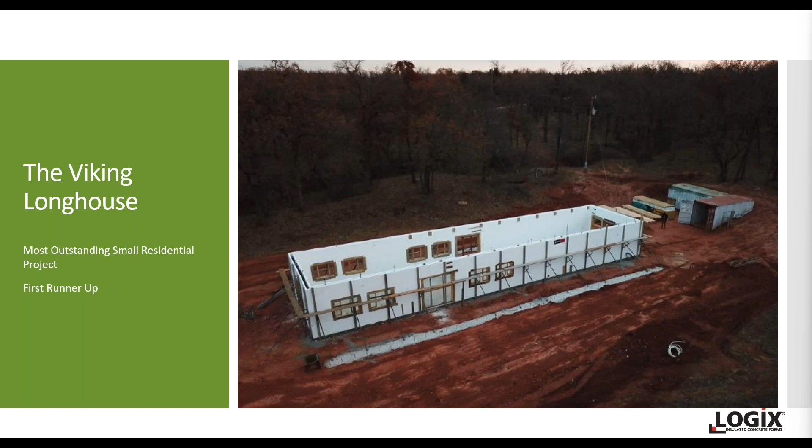This design concept has roots in the ancient Viking Longhouse, and it actually creates an ideal space for passive cooling and heating techniques. In the good old days, they used stone to create the walls and wood framing for the roof, and now Casey's using Logix ICF. So in creating this A-frame, Casey used the same concept.

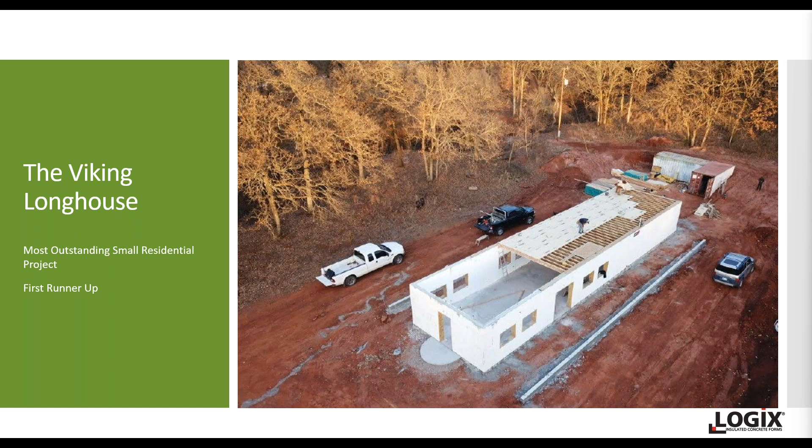The A-frame roof itself spans 38 feet. The roof overhangs 9 feet on each side, and that's going to provide space for covered porches and greenhouses, which is a really cool part of this whole project. You can see it starting to take shape here. The rectangle slab is oriented east to west and measures 20 foot wide by 80 foot deep.

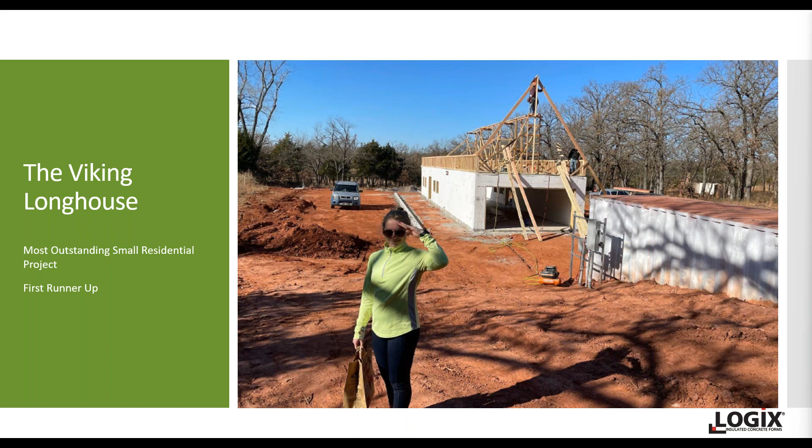And the wood frame gable roof is insulated with 2 inches of closed cell spray foam insulation, topped off with an ag panel metal roof. The downstairs is going to feature a garage, a utility room, restroom, living room, and kitchen, which is going to be open to the second floor with a Big Ass ceiling fan filling the space.

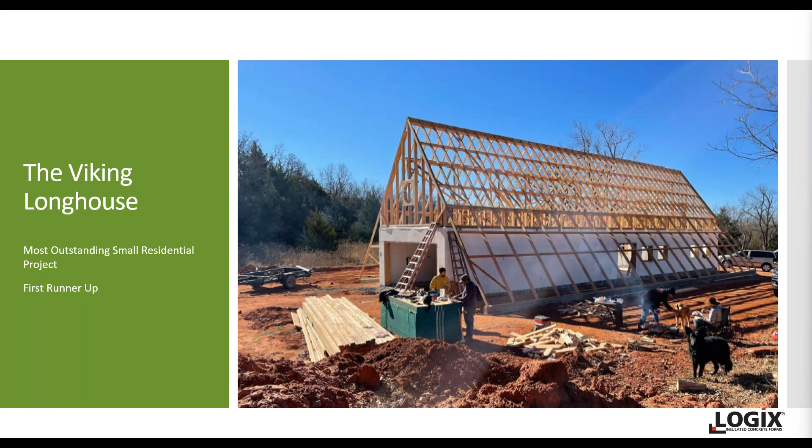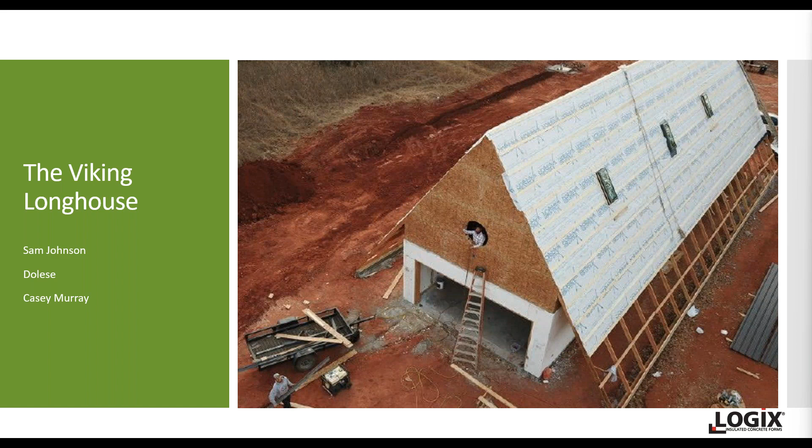The second floor is going to be supported by 2 by 12-inch ledgers and anchor bolts. And then the I-joists are going to span between the two 12-inch ledgers, as you can see here. And that's how the floor is being supported.

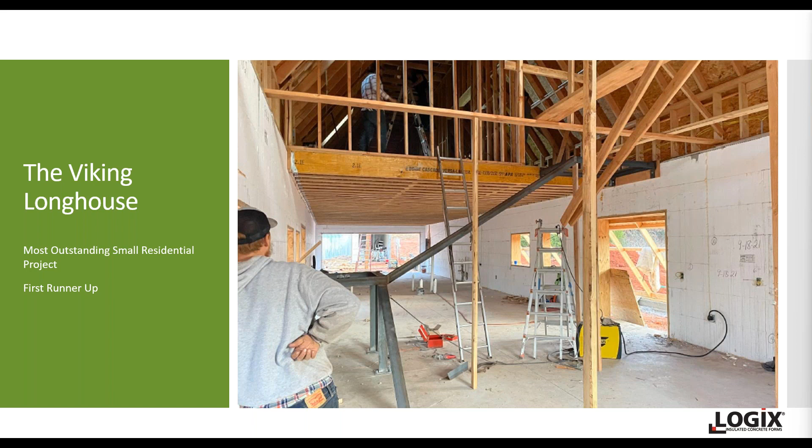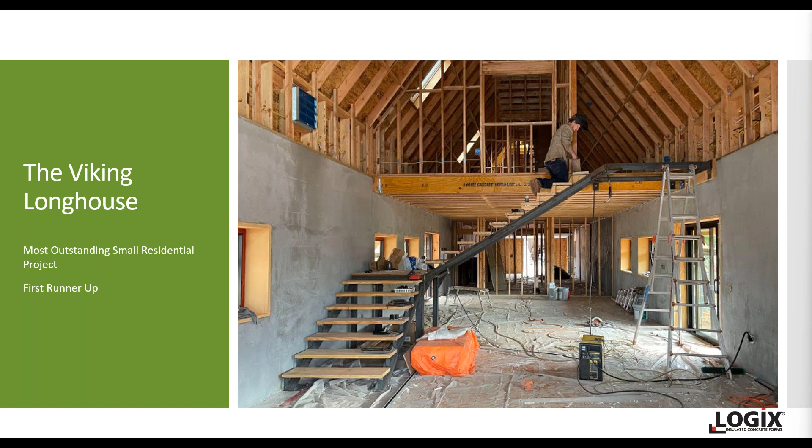The north-south facing windows allow for passive cooling and natural ventilation. Each bedroom is going to have a facing operable skylight to allow for stack effect natural ventilation. In the kitchen, there's a wood stove for heating the entire house, and the stovepipe spans the entire height of the open space. The Logix blocks were finished with a stucco in the interior and exterior, essentially creating an EIFS system inside and out. And the Logix blocks help create the thermal mass in ICF, help create this passive home.

It integrates a functional greenhouse within the home where the garden is in the pantry and it's considered just a utility, just like electricity and water are. It's a fantastic and a very cool design. It's something we can all learn from. And congratulations again, Casey with Sam and Dolese for the Viking Longhouse.

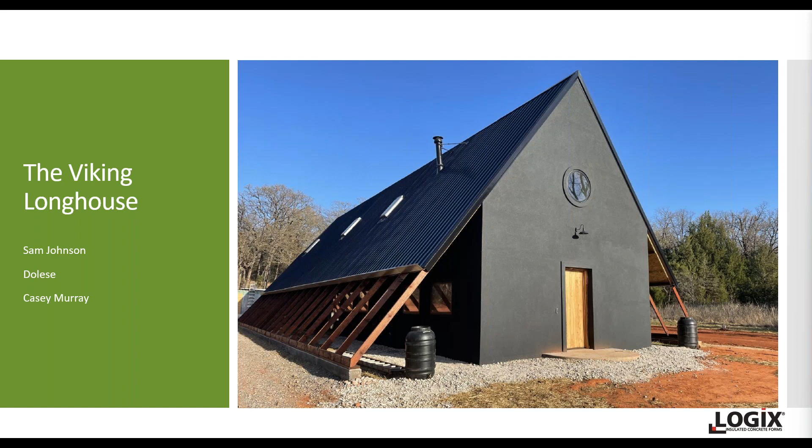All right, so that brings us to our winner in the most outstanding small residential category. And the winner is the Conservative Contemporary Home. And this is located in Creston, British Columbia, Canada. Jeff Nipper, Logix Territory Manager, providing the support. True Build Contractors are the builders of this great smaller residential home.

True Build is always focused on high-performance homes, and it had been using Logix ICF for a number of years for its foundations. But with the wood prices up, and you keep hearing that, they went with ICF to the roof with this new home aiming for what's called Step 5 compliance. Now, in British Columbia, Step 5 is the highest level of the new building codes being introduced in British Columbia. And in Canada, those codes in British Columbia have influenced the National Building Code.

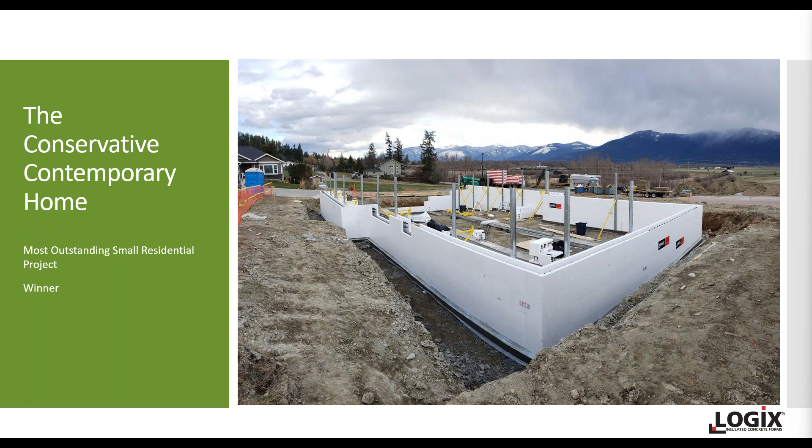And the National Building Code of Canada has just introduced its own set of tiered codes that are going to influence construction in the country of Canada for the next 20, 30 years. If you want to learn more about it, visit the blog that we have on buildwithhalo.com, one of our product websites, where we get into the 5 tiers of the National Building Code in Canada.

Essentially, the tiers right here, tier 5 is the highest tier you can do, and it's very similar to the tier that True Build hit with this home, which is a 40% improvement to the envelope and using 30% of the house energy target. So basically 70% less energy than the model home. It's a fantastic achievement. So this home was actually the first Step 5 home in Creston.

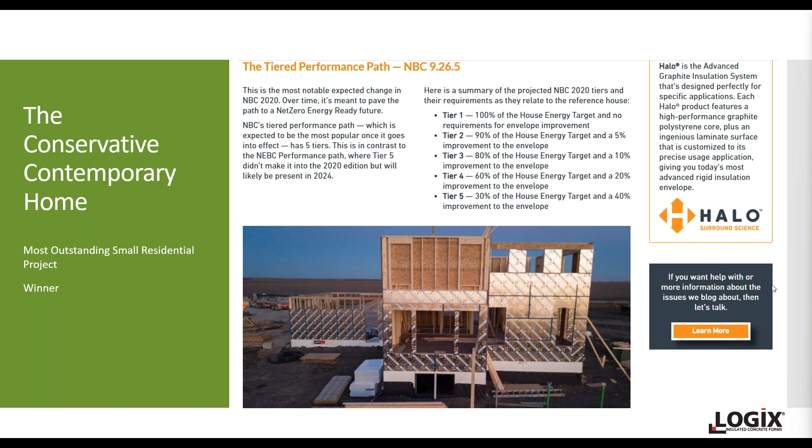So the way they did it in this case is they incorporated 8-inch, I know the picture's off to the side a bit, but it's 8-inch Logix ICF walls. Now they also inserted 2 inches of graphite polystyrene foam core. So they beefed up the insulation of the Logix wall to help hit that step 5. And so it just added more insulation power, and actually reduced the amount of concrete that you have to use, because it reduced the core back down to a 6-inch core for concrete.

This home, part of achieving these standards is to get a great air tightness score. And this home scored an awesome 0.45 air changes per hour, which is quite fantastic.

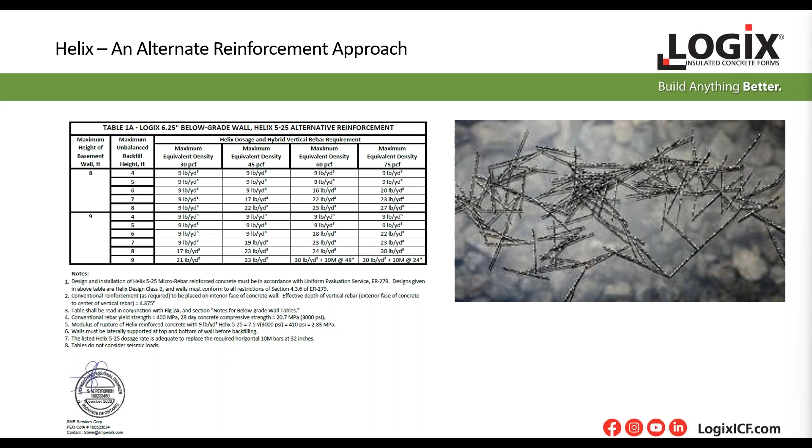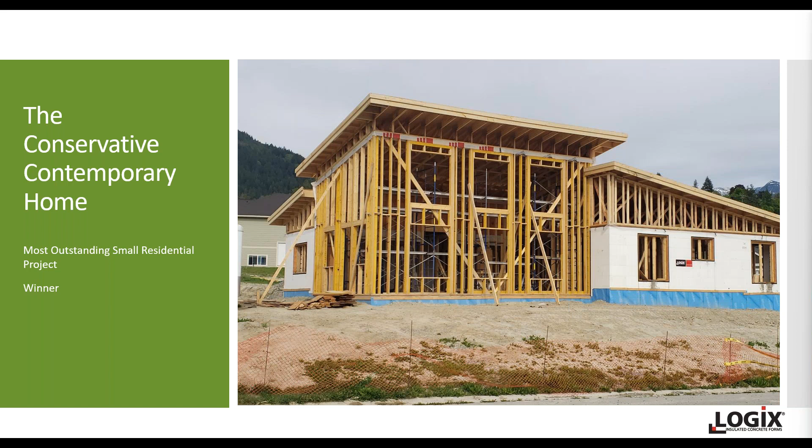But this was brought up to Logix thermal efficiency. They brought it up to approximately an R37 using R22 Rockwool and applied 3 inches of Halo Interra to the interior. Here's a picture of the Halo Interra, and that's one of our products as well. And you can see the Interra being used to beef up the inside.

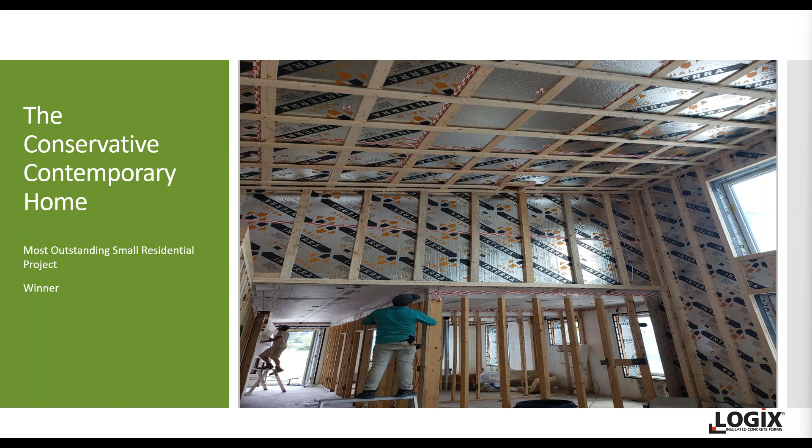The appropriate windowed elevations incorporated into the vaulted ceiling. There's a focus on maximizing the exceptional views of Creston Valley. It's just a gorgeous home. And you know, for a small home, a section of the footprint is actually dedicated to a fully featured in-law suite, which is quite unusual. There's a total of 3 bedrooms, 2 kitchens, 3 baths. The master ensuite features heated floors and a tile shower.

It's just a wonderful home. It's going to cost an average of about $200 a month to heat and cool. And every new customer that TrueBuild Contractors courts is sent to this home as an example of the way they intend to build going forward. So congratulations to everybody involved with this home. Jeff Nipper, TrueBuild, the conservative contemporary home, our winner, small residential this year.

All right, on to large residential. The first runner-up in large residential, which is always a very interesting category, is the oceanfront home in Plymouth, Massachusetts. 3,309 square feet of living space, 4,000 square feet of Logix wall. I mean, this home is very much influenced by its coastal location. It was the organizing principle for almost all the design and construction decisions made into the home.

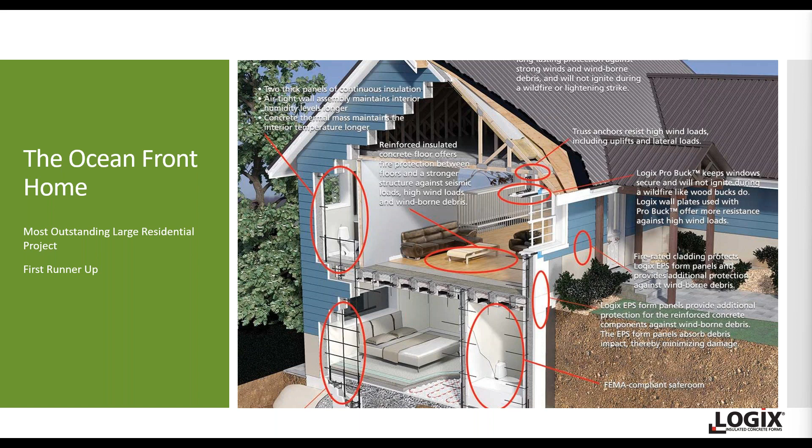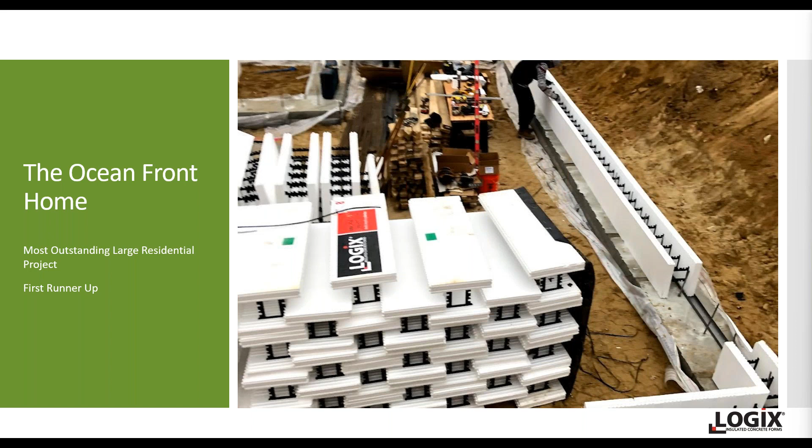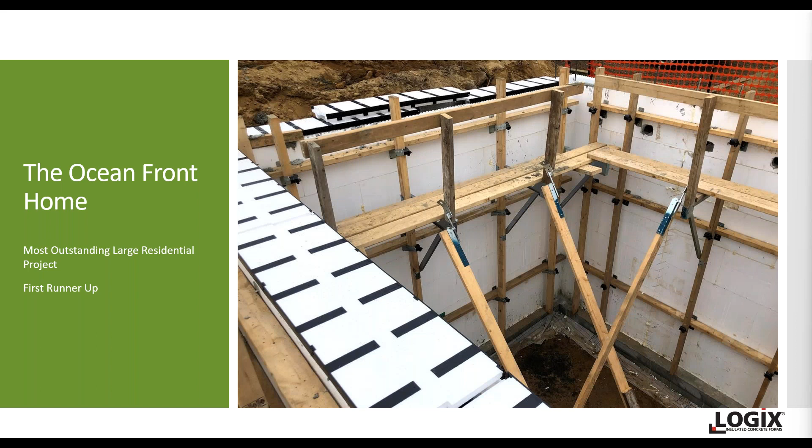This project used 8-inch Logix ICF in the garage and foundation portion, and then they transitioned to a 6-inch ICF for the remainder of the walls. That's quite a common way to build. Significant open interior space was completed with large floor spans that eliminated the need for supporting beams and posts, having high ceilings on all levels, just made for a nice, airy, open concept. So they've accomplished in a series of steps durability, comfort, energy efficiency, and soundproofing all in one.

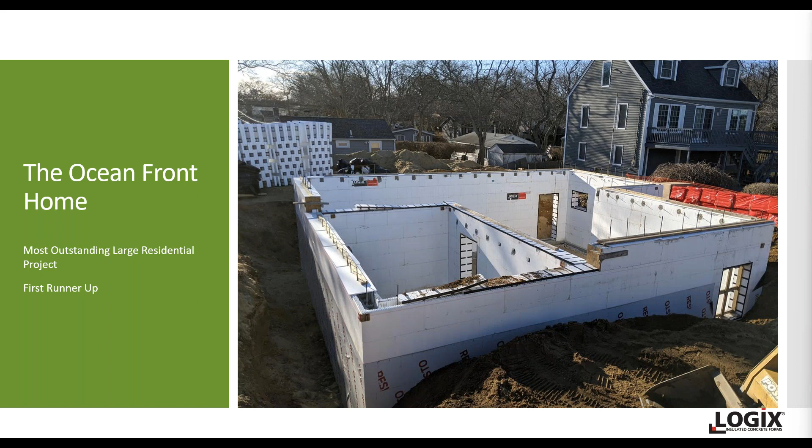Now, if you take a look at the basement as the basement's being built, you can see the basement being built, and then it looks like a concrete floor in the main floor being laid down. And you can also see in the basement here, the foundation, this is HeatSheet. So they've got radiant floor heating in the basement slab, and they're using HeatSheet, which is yet another one of our products, to place the PEX tubing.

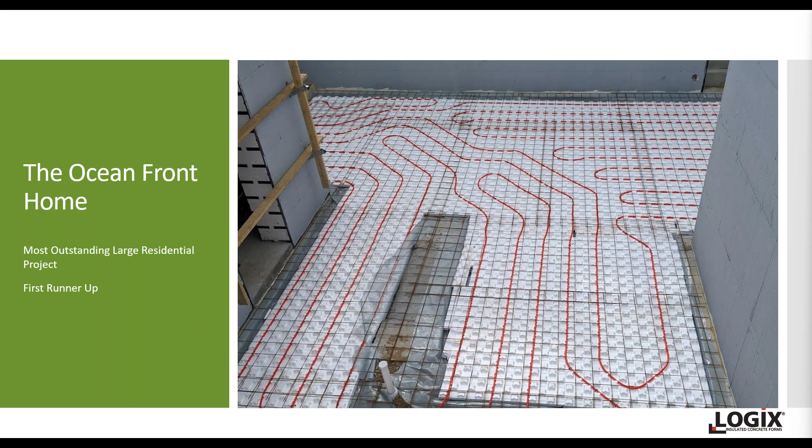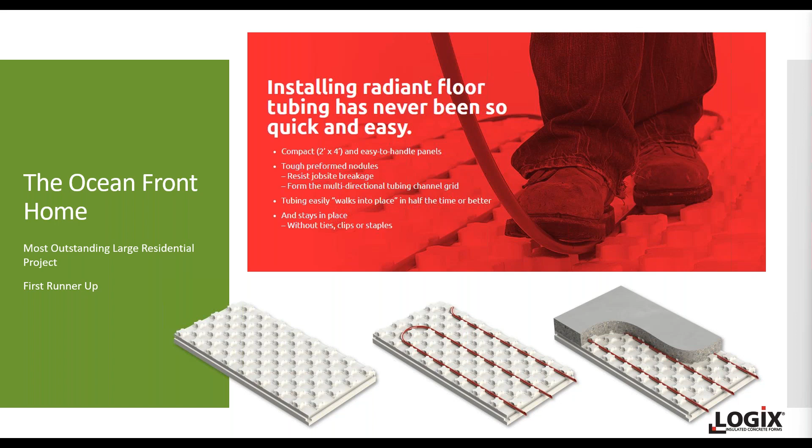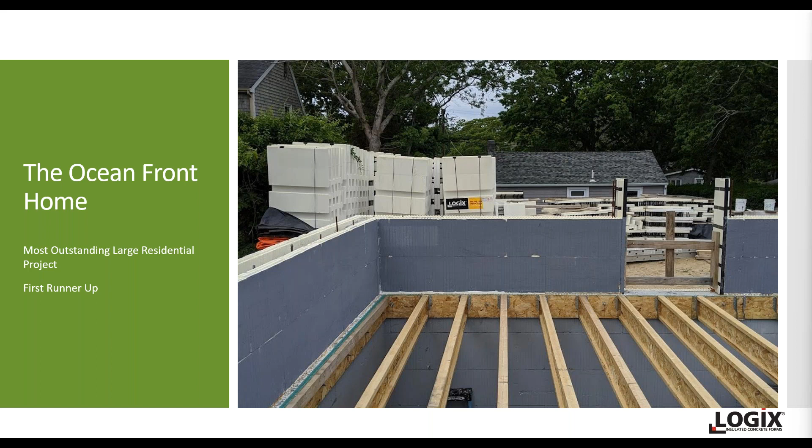Now you're going to see our product here with a gray color, and you don't often see this. What the builders did is they covered it with a latex primer to protect against the UV. And I don't know if we can necessarily recommend that, but that is what the builders and developer chose in this case to do. So we pointed it out. It seems to work very much for them. There's some of the slab work being done outside.

This is going to be an all-electric setup for appliances, heating and cooling, hybrid water heaters, and can allow this building to go off grid with solar panels. You can see in the window openings the Logix ProBuck being used to line the buck out the windows. And there's a bit more information about ProBuck.

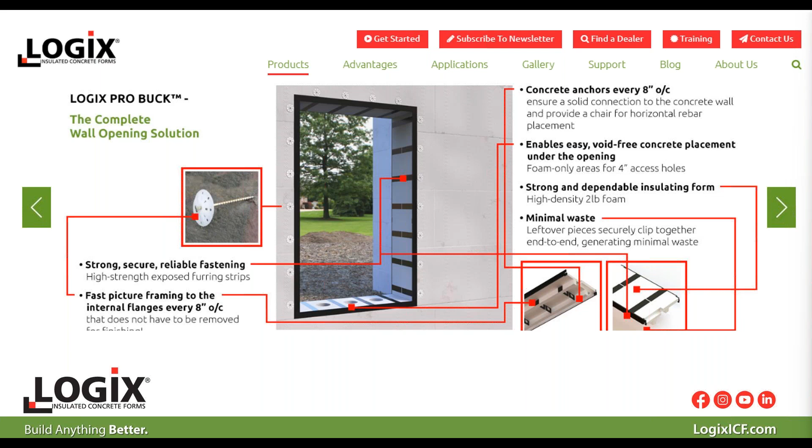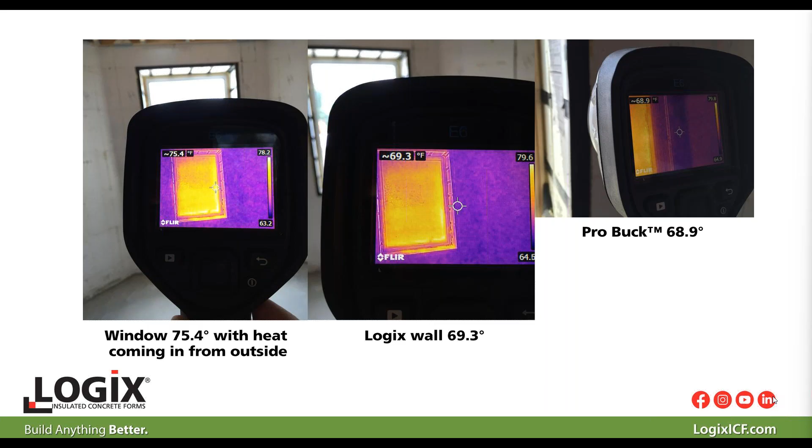And I think more and more of it's being used. It's just a great way to finish off the ICF walls, is to use ProBuck for the openings. We did some thermal testing and, as it turns out, when you use ProBuck, the temperature of the buck is identical to the temperature of the ICF wall, so it just completes the thermal envelope.

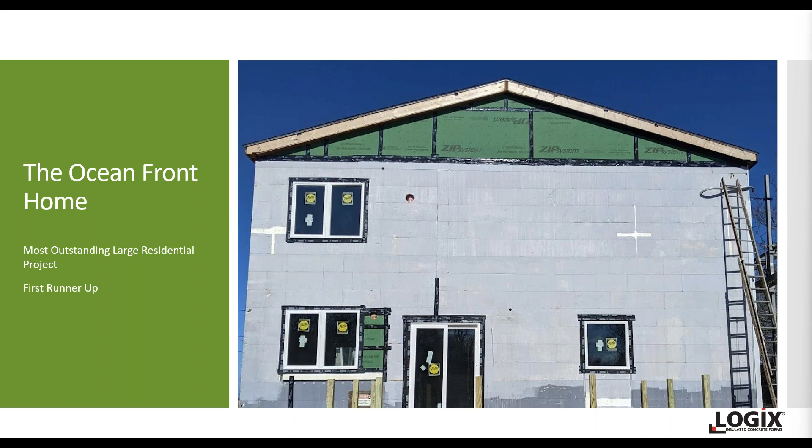So we should congratulate the builders and everybody involved with the oceanfront home. I think I was remiss right off the bat with not announcing the people involved with this fantastic project, and I'm sorry for that. But we're going to recognize Win Peck, territory manager for Logix ICF, who provided the support for this. But most of all, we want to honor Blue Green Building Concepts, who is the developer and owner of this absolutely wonderful Logix ICF award-winning project this year.

We will say one final thing: this home is the first off-grid home in the South Shore of Massachusetts, and it's received recognition from Gibson Sotheby's. So a wonderful, wonderful achievement.

Okay, on to the next project in this category, most outstanding large residential, the outright winner. The outright winner is the Urban Dream Home. The Urban Dream Home was supported by AMC Foam, the local Logix manufacturer, and Paragon Design Build, who is the designer, builder, and actually the owner of Paragon Design Build, I believe, is the owner of this home.

This home is located in the historic Assiniboine area of Winnipeg on iconic Wellington Crescent. It's 6,400 square feet of exquisite living space plus a 2,400 square foot livable ICF basement. It involves 6,700 square feet of Logix wall built in 45 days. Paragon decided to use Logix based on expected comfort, quality of construction, and the performance of the home.

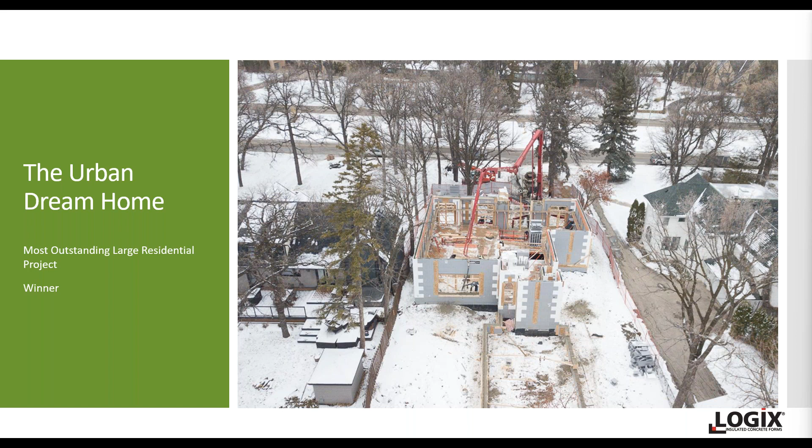This was a winter build, infill lot with lots of mature trees. It involved a 1950s wood frame bungalow teardown. It's a 2-story build that was noted by many Winnipeg business and homeowners, generating plans for very similar new builds. The house was designed to match the very timeless and iconic design of the stately surrounding manors.

This is very central, iconic Winnipeg construction. The front Tyndall stone is fashioned after Winnipeg stone cathedrals dating back to 1880. There you see it taking shape. You can see the 4-inch core there. It's the thinnest core that we offer. It's not the most common use for an ICF product above grade.

I guess most of our walls would be built with the 6¼ inch core, but the 4-inch core is a very strong block. It conserves the concrete, and it can be used. The 4-inch concrete core is part of building code in the United States. Up in Canada, it requires some site-specific engineering, but it certainly will reduce your concrete costs and can also increase your livable space inside by creating exterior walls that are a bit thinner.

You're also going to see some of the gray block here. Now, the gray block is actually, in this case, not latex primer. This gray block is deliberate. This is Logix Platinum Series block. It's a line of product that's made with a gray Neopor, graphite enhanced EPS bead, which you see here. And it just allows you to deliver a wall with increased R value without increasing thickness.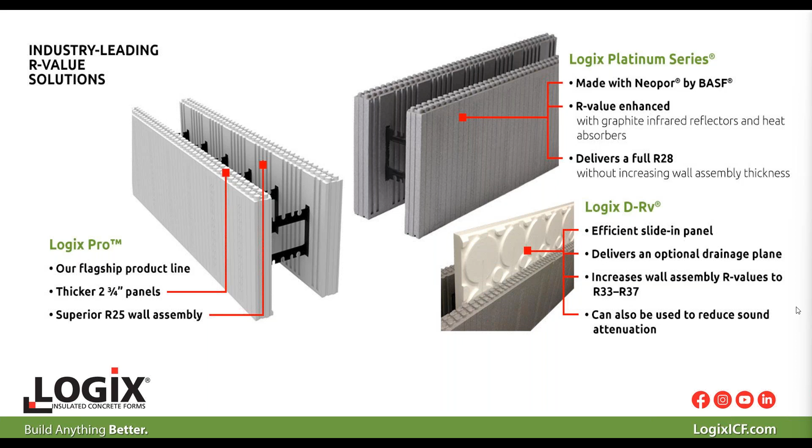On we are now to commercial. And our most outstanding commercial, well, let's take a step back here.

We've got a couple of different commercial buildings we're going to be profiling. And you know what? They're each going to look at the advantages of building with Logix ICF in different seasons. So these are two builders constructing in two different seasons, gaining benefit from constructing with ICF.

So our first project we want to recognize is the first runner-up in this category. It's Classy Chassis. The Logix territory manager, Mark Gifford, Carey's Lumber and Building Supply, the local Logix dealer providing the product and the support, and Clifton Land Company, the builder of this fantastic light commercial building. This building is a car wash facility built in Williamsville, New York. It's a 4,500 square foot footprint, and it involves 4,000 square feet of Logix wall.

It was built in 12 days, the Logix portion, at a labor rate of 0.08 man hours per square foot, and that's a very efficient labor rate. So Clifton obviously knew their way around this. They've been building car washes with Logix foundations for years, but now with this project started using Logix for more complex commercial construction. So this was a winter build.

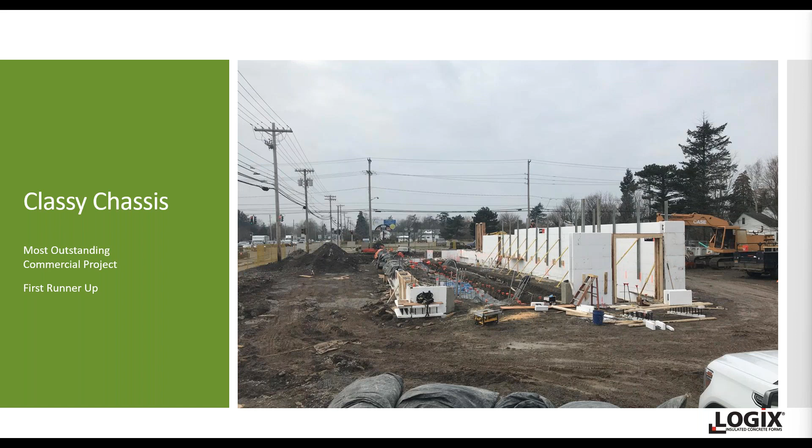Okay, so now we can actually talk a little bit about how Logix helped Clifton maximize efficiency through a cold New York winter. Speed of construction was a paramount factor here because Logix allowed the builder to construct the facility during winter months, allowing the car wash to open close to their target date in the spring. So getting the incoming revenues earlier. And plus, with the COVID-19 shutdowns and the extended lead time on lots of materials, it placed even more emphasis for Clifton on the need for a product that was quick and easy to construct.

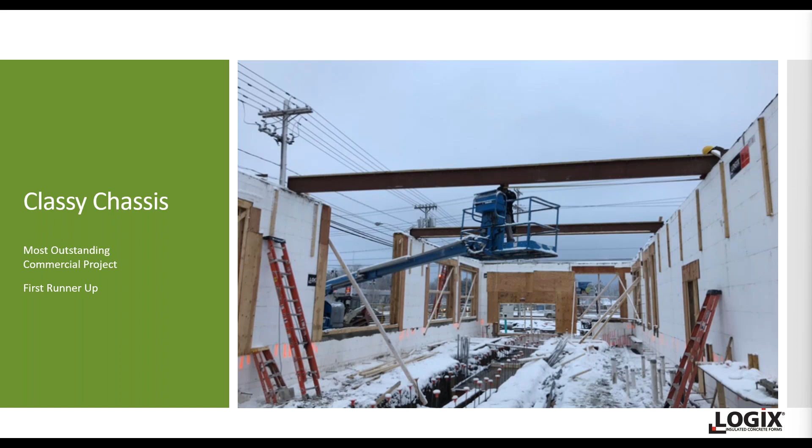That being said, they hit rock at shallow depth during excavation. Footer had to be pinned to stone with deeply bored holes, accepting #8 and #6 rebar. It was a fairly complicated build. If you look at the massive, pretty big windows, and lack of interior walls for structural support. There's 14-foot tall walls that had to be braced and engineered to comply with state and local building codes.

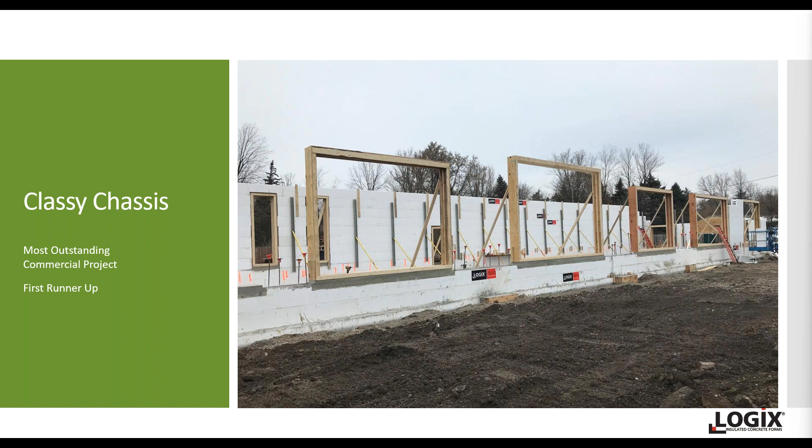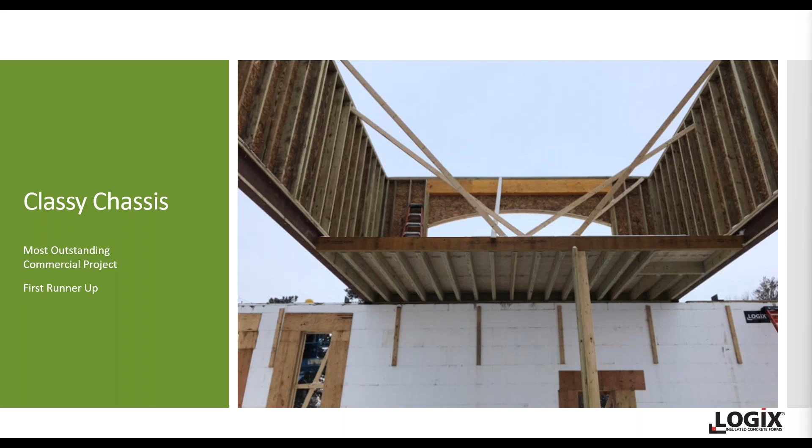Had to support the walls and the ceilings. So they had to custom fabricate anchors and sheath trusses into the Logix wall system. Had to make sure that the 14-foot tall walls met all the wind loads with all the custom I-beam and truss mounting plates that were required. But the solid Logix interior walls are a perfect substrate for Clifton to attach the FRP panels, which they needed to do for just the nature of this car wash.

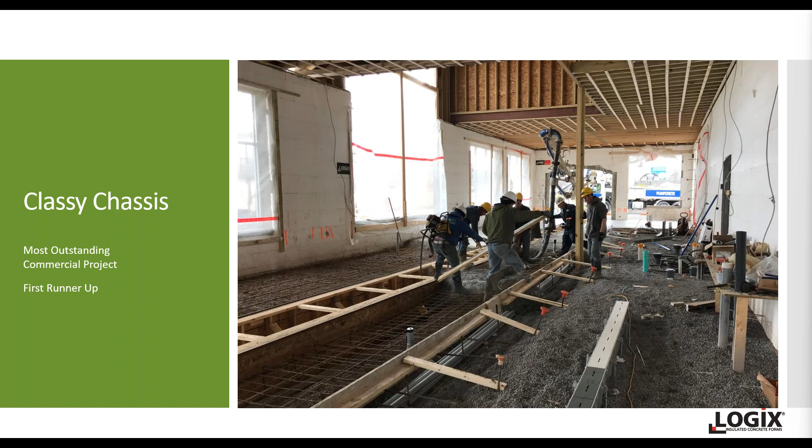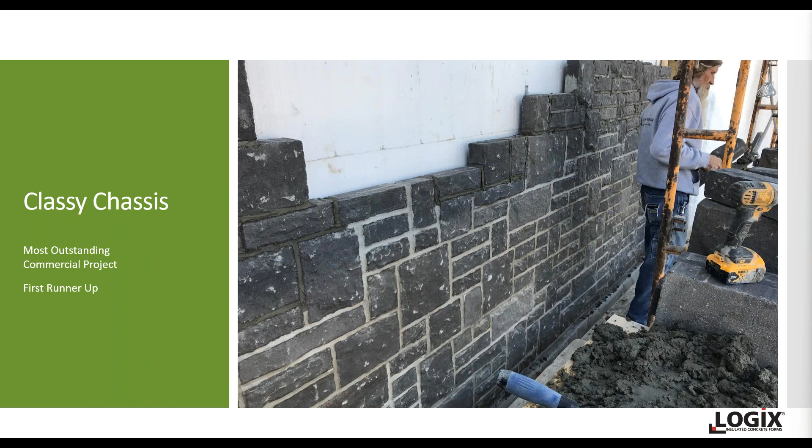So that's fantastic. Then when you look at the exterior, the carrying of stone over the doors and archways, they use rolled stainless steel arches to support the concrete and stone. And around the windows and openings, they actually cut back the ICF foam to allow for full depth concrete. Here's some of the detailing that you can see, and it's just a wonderfully detailed building.

The R value delivered by the Logix wall system is critical in helping maintain a comfortable work environment for Classy Chassis employees throughout the year. And the added benefit actually is during the winter construction, it made for a very comfortable environment for the construction crew. So for saving substantial money in construction costs, making an immediate impact on reduction in energy consumption, and for simply transforming a site from a rundown abandoned gas station to a beautiful quality design construction facility, we want to recognize Mark Gifford, Carey's Lumber, Clifton Land Company for Classy Chassis. First runner-up, most outstanding commercial.

All right, let's flip the coin. Let's go to most outstanding commercial. Our winner, this is Landings Point Industrial Park. Supporting Territory Manager, Jeff Nipper, supplying Logix dealer, Utah ICF, and you can't mention Utah ICF without mentioning Dan McCullough, that's his company, and Dan's been a Logix ICF and ICF in general advocate for years, and they provided the support to Done Right Construction for this very impressive facility. This is located in West Jordan, Utah. It's a 17,280 square foot footprint.

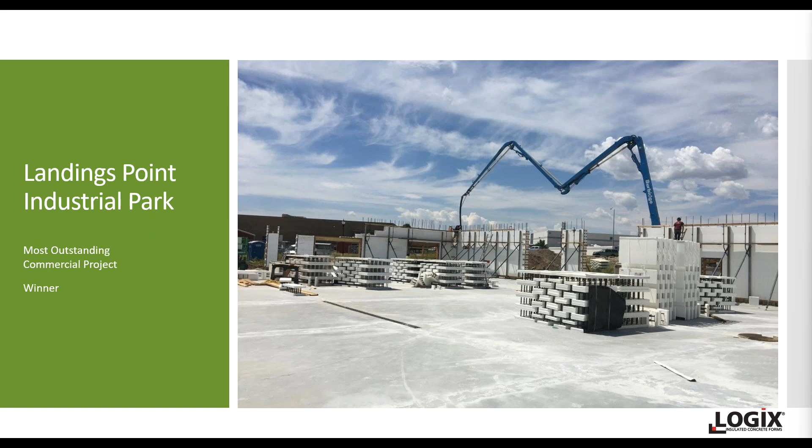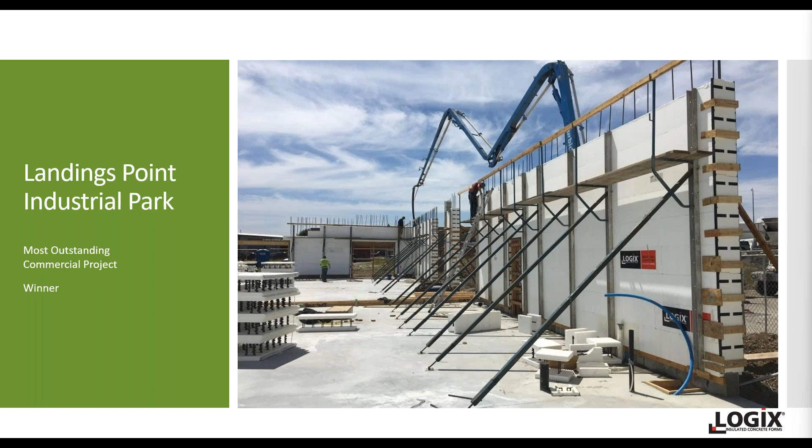Working together with Dan McCullough, they were able to pre-order and order material on site, avoiding additional lost time and risk to the construction projects, which was just happening all over the place last year. Pre-planning and proper housekeeping at the job site allowed our construction crew to keep material properly stored, says Done Right. This is a summer build in Utah, 100 degrees Fahrenheit outside temperatures, no air conditioning indoors. The building remained cool. It was sheltered by the Logix ICF walls and the EPDM roof with R38 rated insulation.

You can see how some of the Logix block got a bit discolored due to UV exposure. That can happen. If it's not extensive and this is just surface discoloration, it doesn't affect the performance of the block. Sometimes that can happen when there's extensive UV exposure.

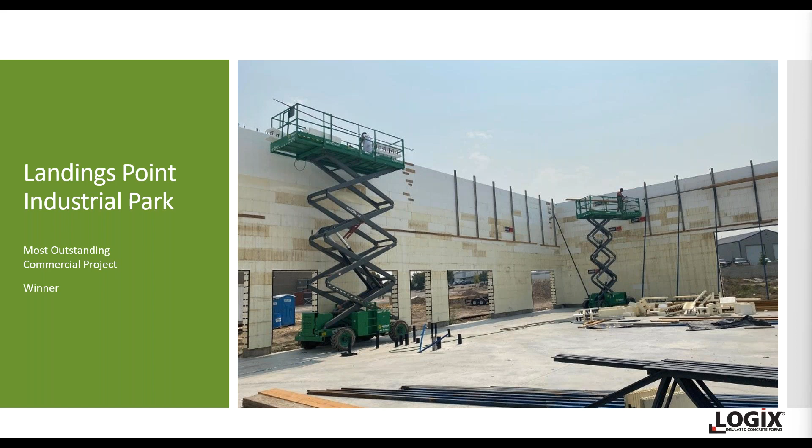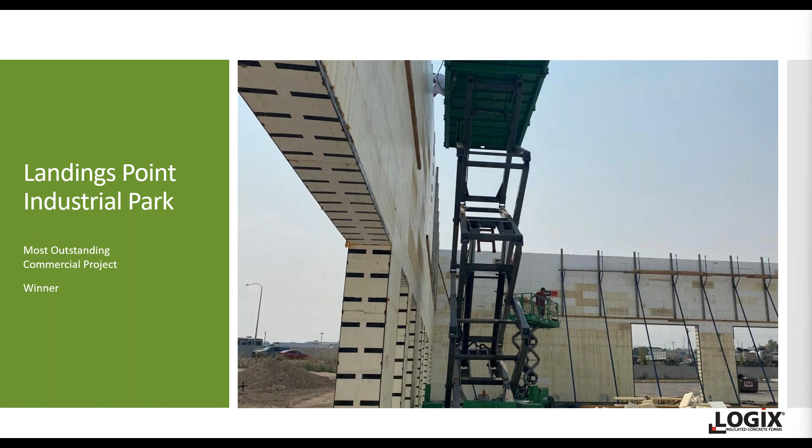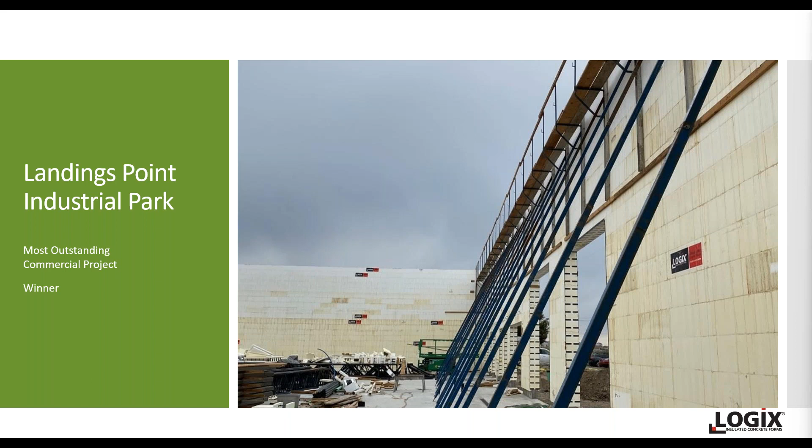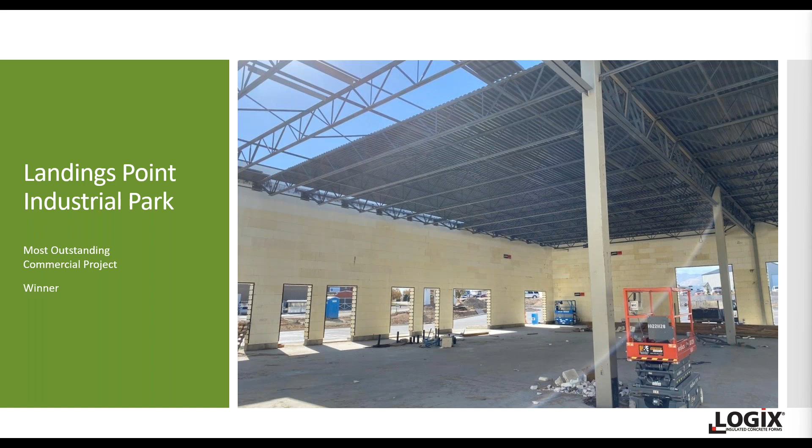This was Done Right's first time building an ICF project. It was successful. It was self-performed. It was efficient. It was done on time. And they've taken this experience and shown high school and college classes the benefits of this type of sustainable and easy construction method. They faced all sorts of challenges with COVID-19, material availability, inflating costs, but you know what? They got through and were ultimately successful. And so we want to recognize again Landings Point Industrial Park, Jeff Nipper, Utah ICF, Done Right Construction.

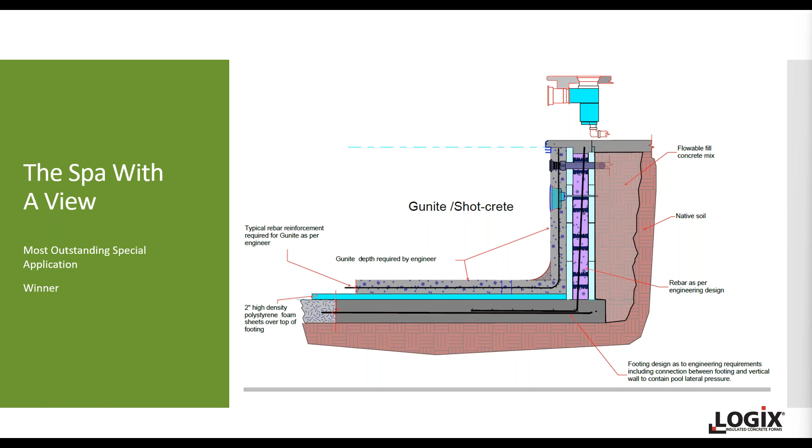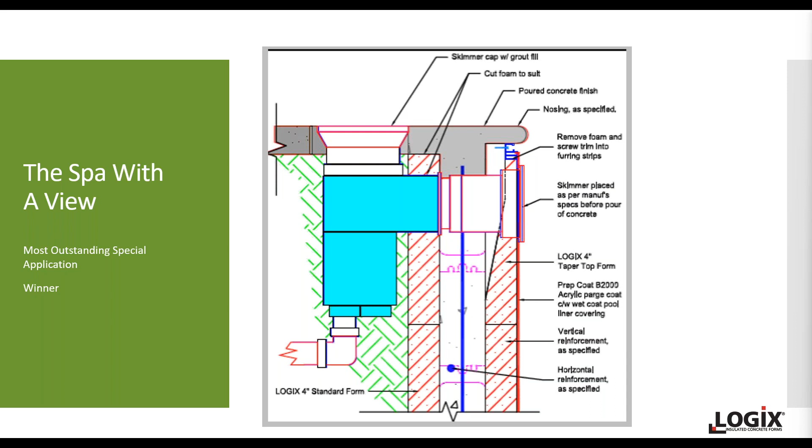Here's some of the details from Dan's project. You can see how they thought through the configuration here and the construction of the pool. You can see how they thought through the various detailing. So there's a lot of thought going into it and how everything properly works and integrates together.

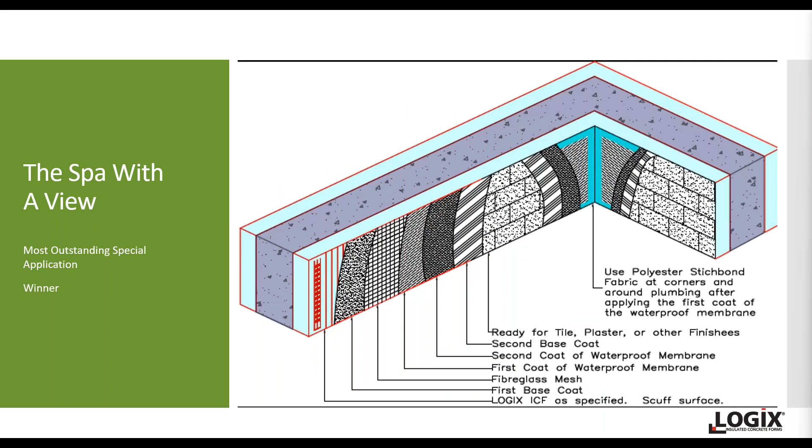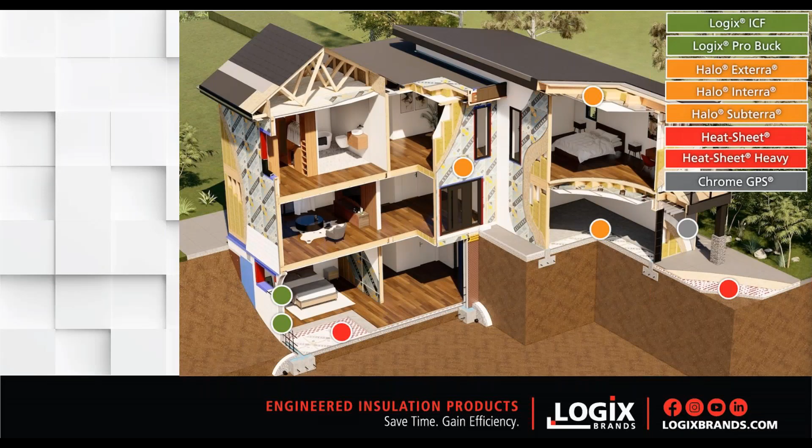And the final project that we're going to talk about today is kind of a new category, because up to now we've really focused on insulated concrete forms, Logix ICF, but we want to talk about recognizing construction using a variety of our products as a system. We started with ICF, but we've added complementary products into the Logix brand's system of products. It's none better illustrated than this diagram here. You can see this diagram on logixbrands.com, but it shows how our products fit together.

I mean, you can use Logix ICF, of course, above grade, and it's often used above grade, but here we're showing it used in the below grade application, but in combination with Halo, Heat Sheet, Chrome GPS, our other products, all to create a fantastic building envelope. And in this spirit, we want to recognize the Sustainable Home in Tuelon, Manitoba, supported by AMC Foam and built and designed by Hollyhock Construction.

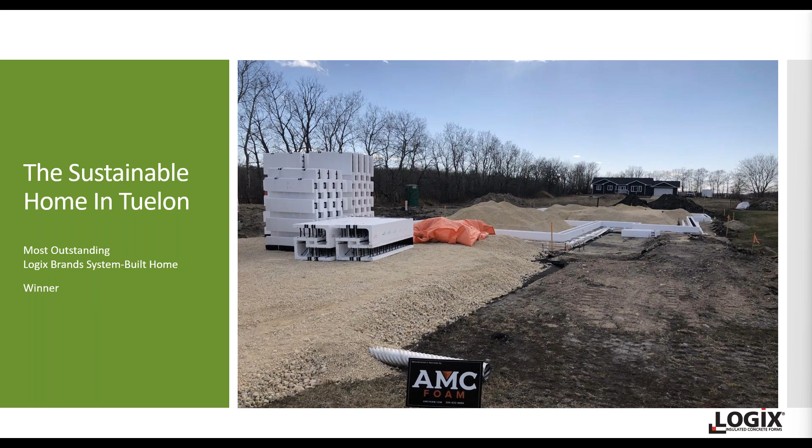So this home is 2,925 square feet, including garage and patio. And it was designed to be very accessible. The clients had a very specific need here. They wanted simplicity in all parts of the home, total accessibility to garage, patio, sidewalks, dining area, and living area, and requiring the non-living areas and the garage to be as comfortable as the home. So it's a tall order. The challenge was to provide structure and comfort in these two separate areas of the home.

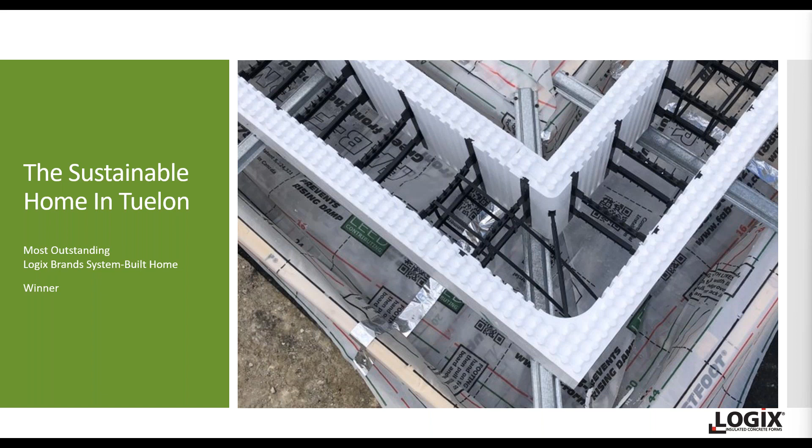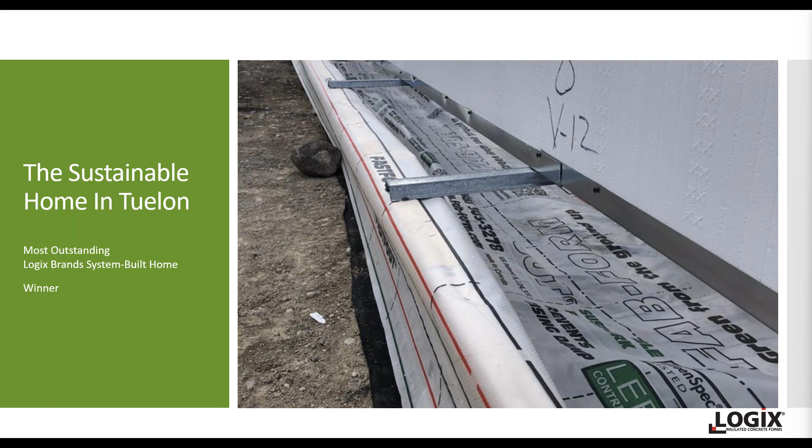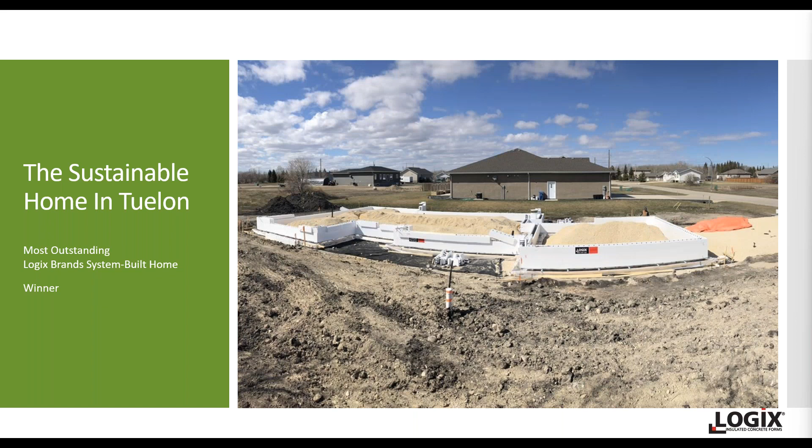So you can see that this is the Logix ICF being used in the grade beam to raise the level of the home. And as a side note, Sean Murphy, the owner of Hollyhock, used Helix reinforcement here for the reinforcement of the concrete. You can see it's starting to take shape. A Logix ICF portion. Then you can see Heat Sheet being used in the underslab insulation for the main floor slab. So it's radiant floor heat throughout.

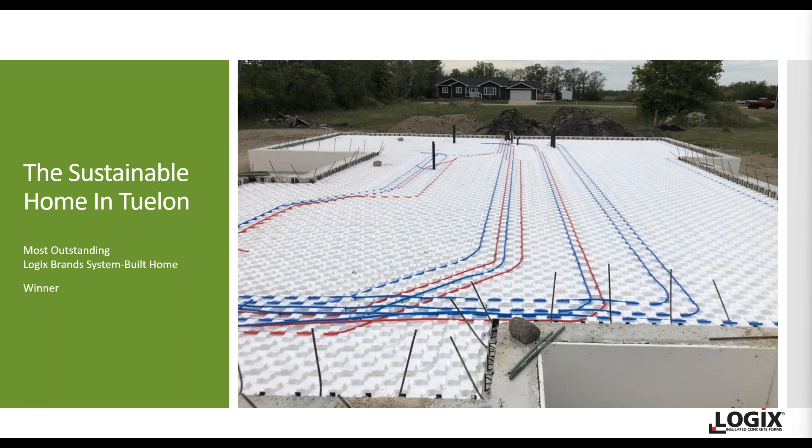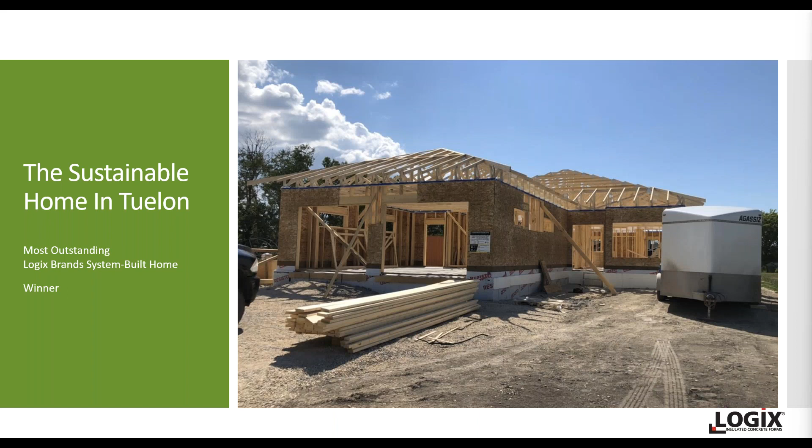AMC's Styrobar, which is a flat stock insulation, was used in the garage to provide underslab insulation. So it's 3¼ inches thick Heat Sheet used in the underslab here, 3 inches of Styrobar used underslab under the garage, and of course our 8-inch Logix ICF blocks used in the foundation. There's R60 roof insulation, triple pane fiberglass windows. Then Sean framed above grade, and then you can see the Halo Exterra.

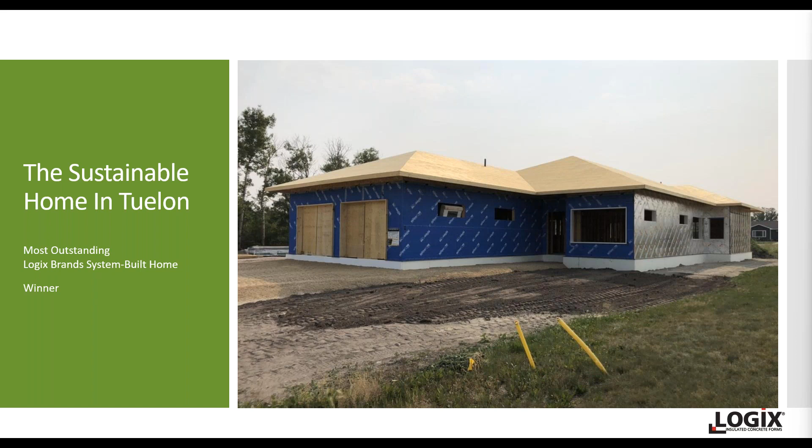We saw Halo Interra being used in the conservative contemporary home in small residential. This is now Exterra being used on the exterior portion of the home. And this was 1.5 Exterra that Sean used on the exterior of the home. So this home was tested for an interior air tightness of 1.254 air changes per hour. It was rated for 76 gigajoules a year, which is 30% more energy efficient than comparable new homes.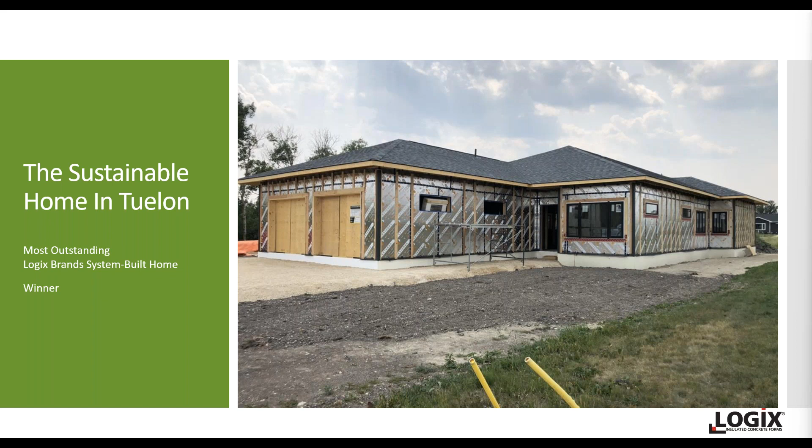And it just showed how the entire suite of Logix brands products can be used together to create highly energy efficient, comfortable, and accessible areas, homes, and buildings. And so we finish off by saying thanks to Sean for this fantastic project, and thanks to AMC Foam for providing such great support. That is it, everybody.